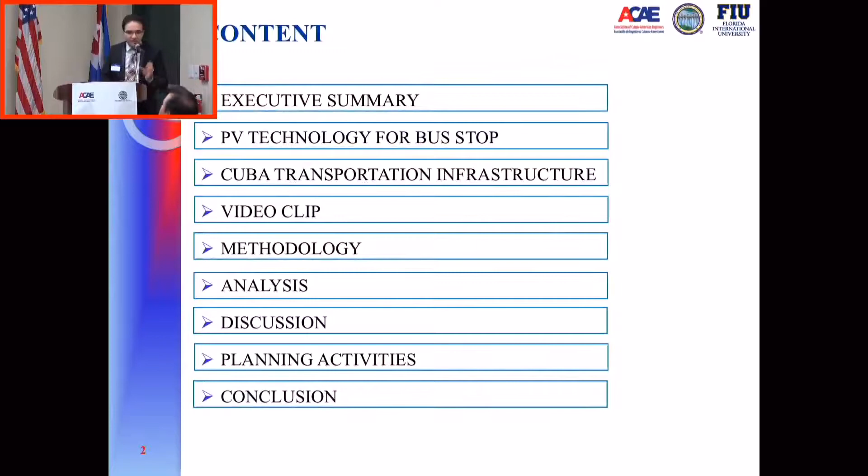At the beginning of the presentation, we would like to talk about the executive summary, and then explain the PV technology bus stops and Cuba transportation infrastructure. In the middle, we're going to show video clips and the methodology, analysis, discussion, planning activity, and finally the conclusion will be presented.

The main goal of the project is implementing the solar power bus stop in Havana, providing the public an opportunity to learn about the feasibility of utilizing solar energy, proposing planning activities to engage the stakeholders, and demonstrating a synergistic integration of an interdisciplinary research team, including transportation engineers, electrical engineers, and economists. Enhancing visibility at night and providing greater safety, and increasing the level of education regarding green energy integration are the main benefits of the project.

The approach: this project has three approaches. First, collecting the transportation and electrical information, then estimating the overall cost of the proposed solar power bus stops, and finally selecting the key bus stops for installing the PV technology.

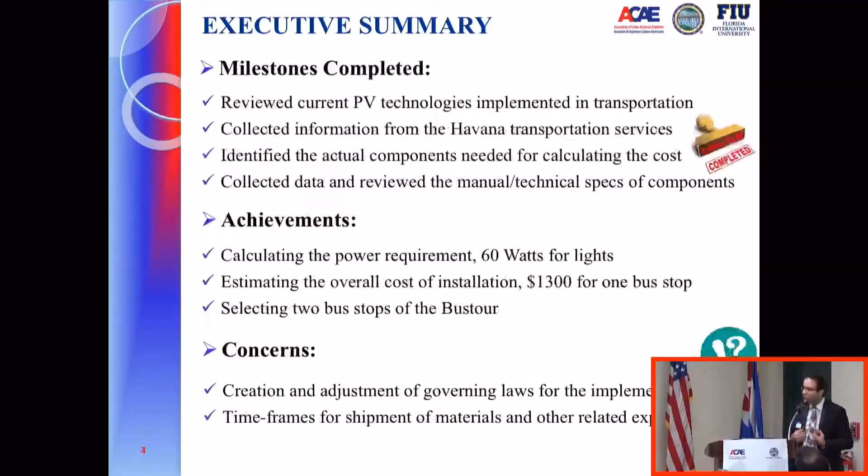To complete the project, we reviewed the current PV technology implemented in transportation services, collected information from Havana Transportation Services, identified the actual components needed for calculating the cost, and finally collected and reviewed the manual and technical specs of the components.

Our achievements include calculation of the power requirement for the electrical equipment for the solar power bus stops, for example 60 watts for the lights, and estimation of the overall cost for installation, for example $1300 for one bus stop for providing the lights. Finally, we selected two bus stops from the bus tour in Havana Transportation Services.

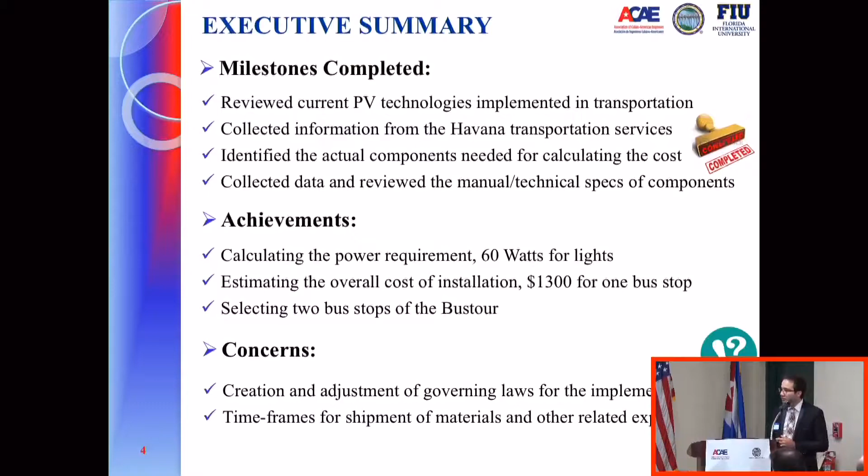There are two concerns we would like to address in our project: the creation and adjustment of the governing laws for the implementation, and the time frame for shipment of the materials and other related expenses.

In the next couple of slides, I would like to talk about the PV technology for solar power bus stops. PV systems usually consist of four major components, the first being the solar panel. The solar panel is made of modules of solar cells, which can be manufactured with different types of materials, such as polycrystalline silicon or monocrystalline silicon.

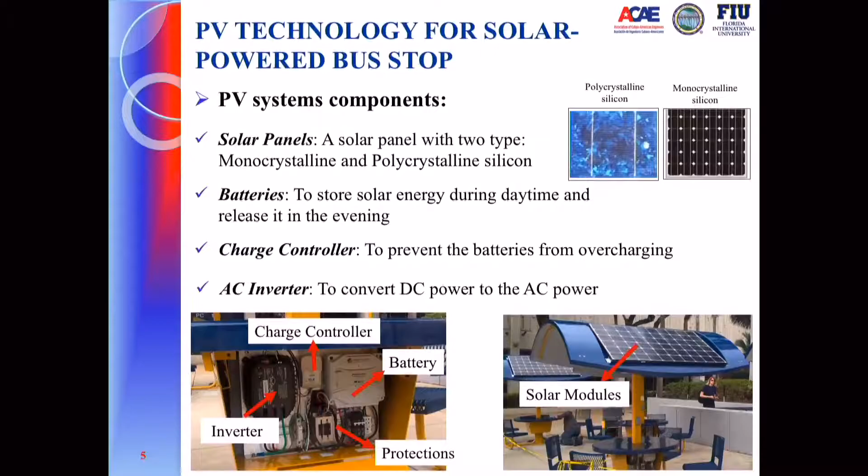The second item is the battery. The battery can be used to store energy during the daytime, the sunny time, and release it during the evening and night. To prevent the battery from overcharging, charge controllers are used in PV system technology. The charge controllers adjust the current and voltage from the solar panels to meet the battery characteristics.

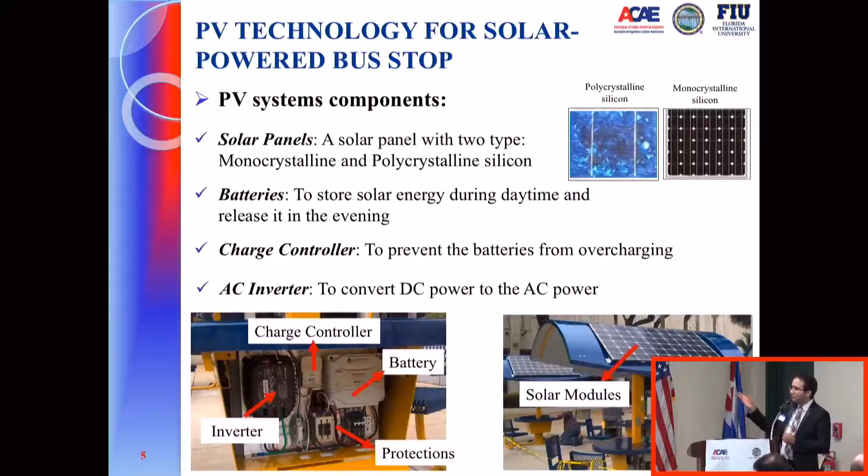For some applications, an AC inverter needs to be used to convert the DC power to AC power. These two pictures show the implemented solar power technology on the FIU campus, including the four major components of the PV systems.

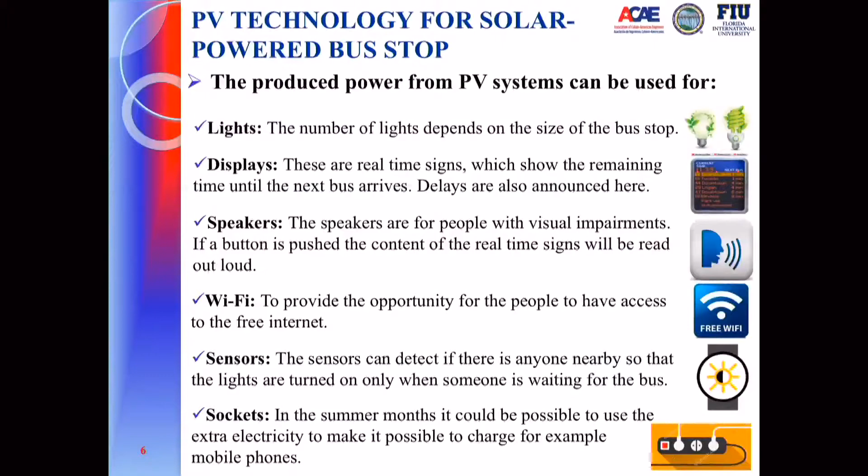The produced power from the PV system can be used for lights, and the number of lights depends on the size of the solar bus stop. A display can show a real-time sign indicating the remaining time till the next bus arrives, and delays can also be announced on the display. Speakers can also be powered by the PV systems, usually for people with visual impairments.

Wi-Fi can provide people the opportunity to have free access powered by the sun. A sensor can detect if anyone is nearby so the lights turn on only when someone is waiting for the bus, saving a lot of energy. Sockets could also be used in the summer months with extra electricity, making it possible to charge mobile phones, laptops, and other electrical instruments.

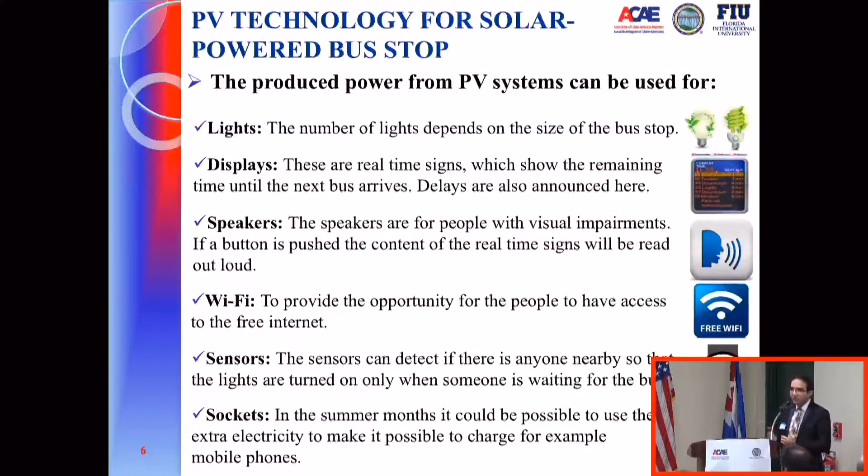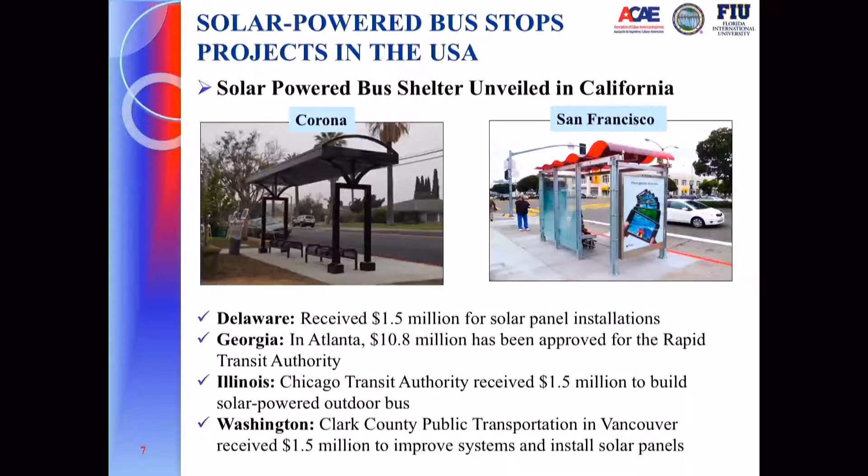These two pictures show two new solar power bus shelters, one in Corona and one in San Francisco, California. However, based on our review, cities all over the U.S. are installing PV technology for bus stops in transportation services.

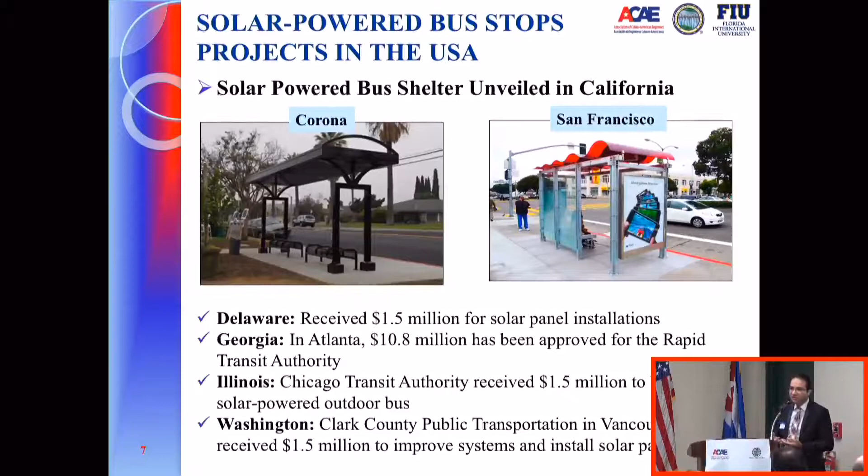For example, Delaware received $1.5 million for solar panel installations, as did Georgia, Illinois, and Washington. That was actually the main motivation for us to think about implementing solar technology in Cuba. Now my teammate Elaine will continue the presentation.

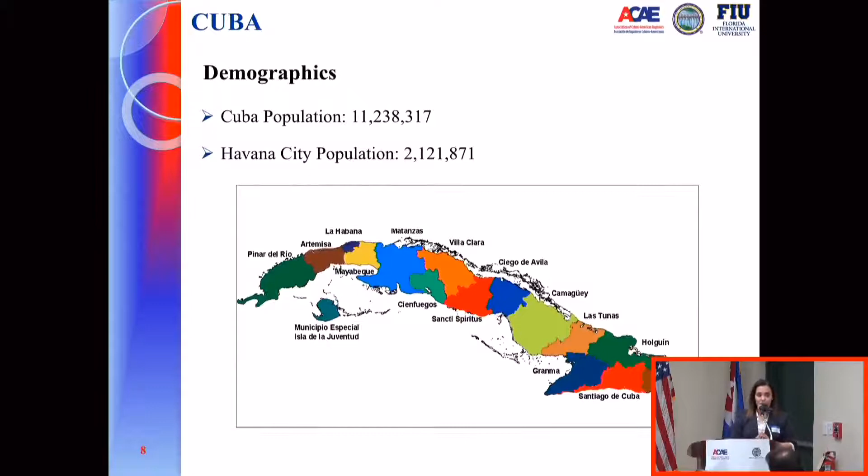For this project, we decided to focus on Havana, given its demographics and the annual revenue it generates through tourism. Havana is the most populated province, with roughly 2.1 million residents, followed by Santiago de Cuba. Annually, Havana receives over 2 million tourists, generating roughly $20 million in revenue.

Given its importance as a center for economic development, we also think it is important that Havana sets the standard for public transportation around the country.

However, the Ministry of Transportation has been facing many issues throughout decades: instability, insufficiency. The prominent lack of safety and the low quality of services are of major concern.

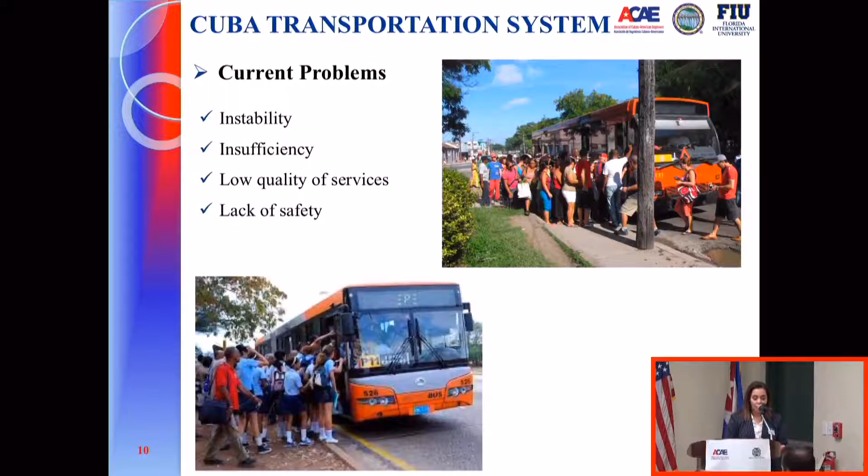Public buses in Havana operate Sunday to Sunday, 24 hours a day. Over 1 million travelers use the public buses daily, with waiting times ranging from 30 minutes to an hour and a half. The night service, popularly known as La Confronta, has waiting times of up to 2 hours and even more, as many buses are retired from the streets past midnight.

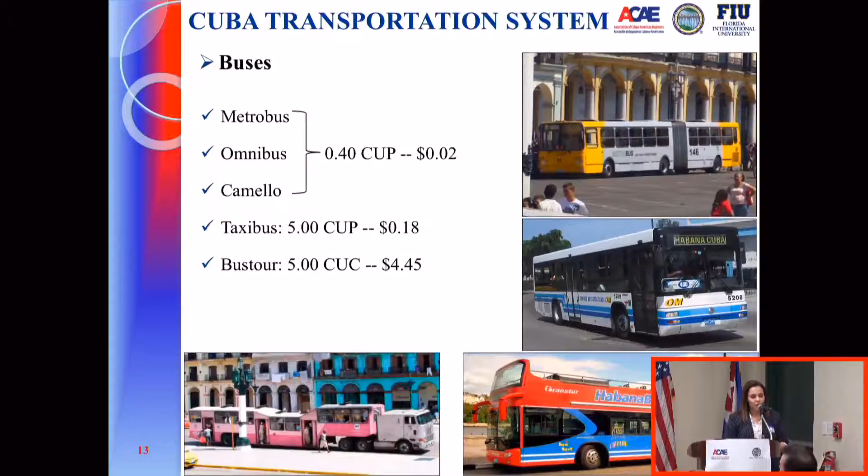The price per ride is 2 cents for the most commonly used service, while the bus tour cost is approximately $4.45. This is equivalent to 125 Cuban pesos, or a week of work for the average Cuban citizen. So it's mostly affordable for tourists.

The main routes are now serviced by the Metrobus, as the Camello has been retired and sent out to the eastern provinces, such as Santiago de Cuba and Guantánamo.

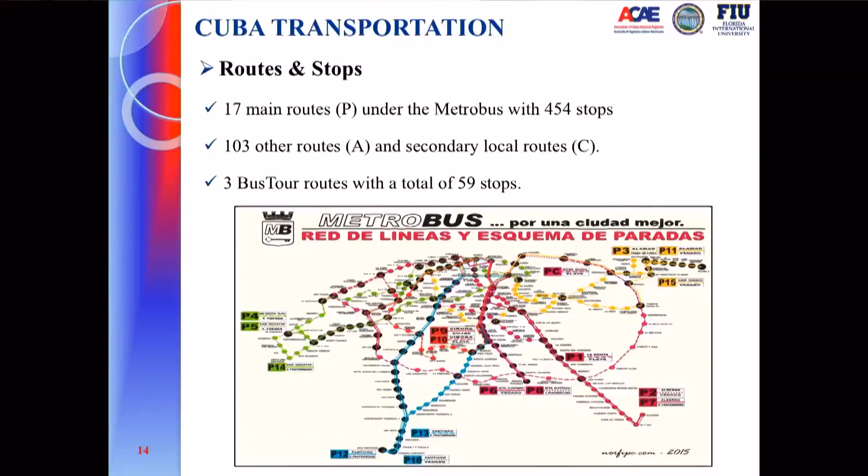There are 17 main routes labeled P. They range from 1 to 16, with an extra route named PC. There's 103 other routes and secondary local routes C, in addition to the 3 routes serviced by the bus tour. This amounts to 3,030 bus stops around the city, and only 35% actually have a shelter.

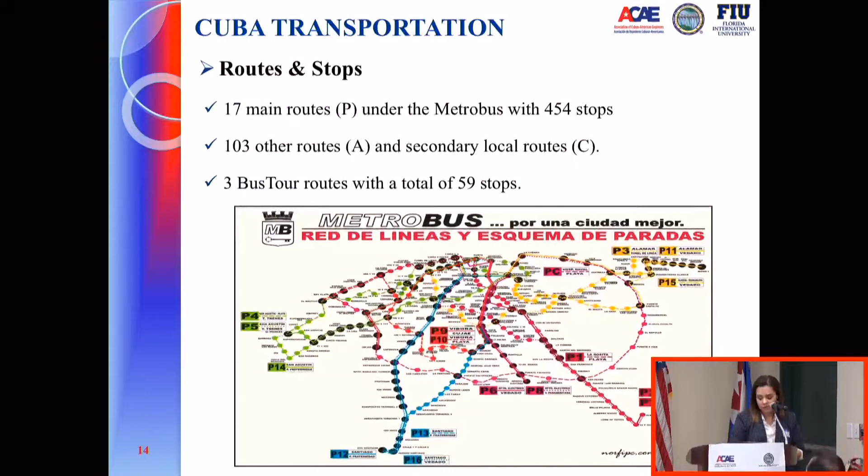The proposed shelters by Sol Urbano seek to enhance visibility, not just for the drivers, but also for the passengers, and increase safety, not simply at night, but also in case of a blackout. We also seek to promote renewable energy use throughout the city on a daily basis, and we wish to educate people on the positive impact that this has for society and the environment.

We will now show you a very brief clip to help you visualize how Sol Urbano, by combining transportation, telecommunications, and renewable energy, will set Cuba worlds ahead.

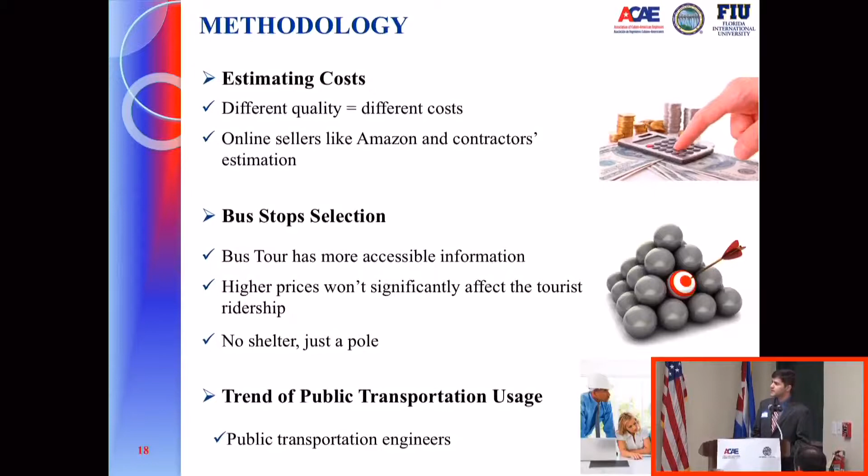And also we wanted to know what's the effect of having a good, new, technologically advanced bus stop on the ridership of public transportation.

So this is the proposed bus stop that we are going to speak about.

It has 45 watt solar panels, which provide 200 lumens per lamp, able to provide 3 lamps. And we need to have solar panel support frames and 3 20-watt lamps and a 12-volt battery system, a wiring battery enclosure, and a solar 12-volt charger and controller. All in all, it costs $1,300 US dollars.

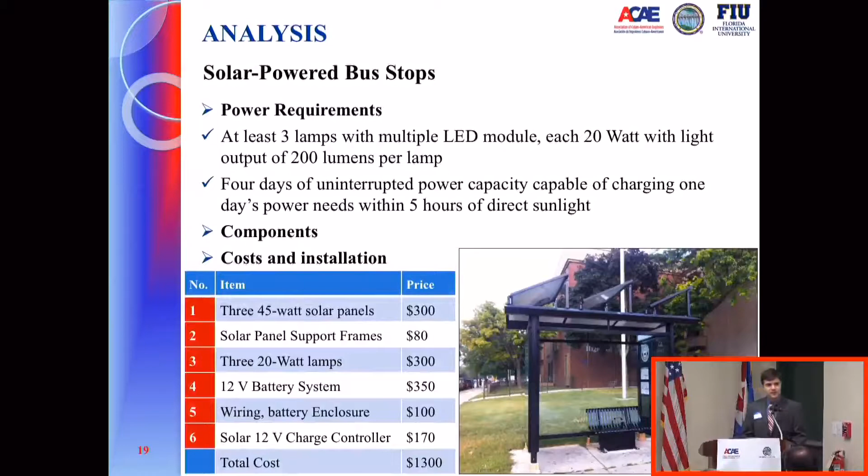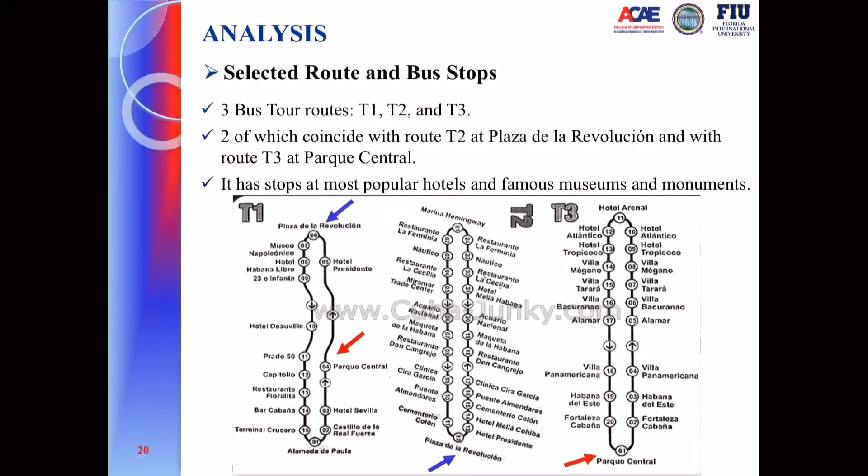And then for the route selection, we decided to choose the T1 route, Tour 1, because it has 2 main bus stops which intersect with 2 other ones: first, Plaza de la Revolución, and another one is Parque Central.

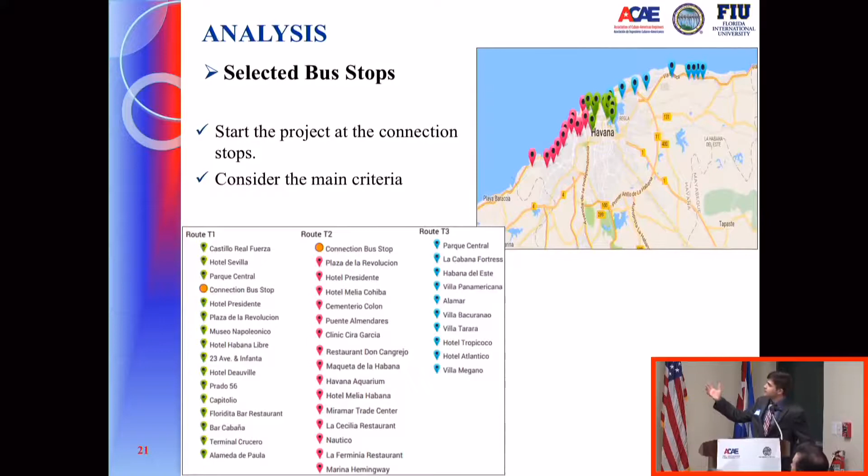And this is giving another interface of the city, and that green one is T1, Tour 1. So the main concern for all the decision makers and authorities is to motivate people to use more public transportation and prevent them from using their private cars.

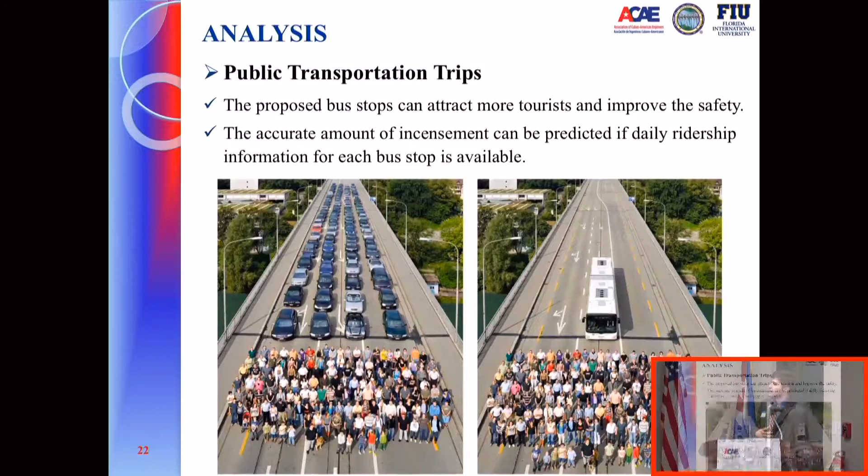So definitely with having a better facility and better quality of public transportation, people are more motivated to use public transportation. One of the main benefits we can discuss is having a light. That's it. So it increases the security of people, especially women and children, during the whole day.

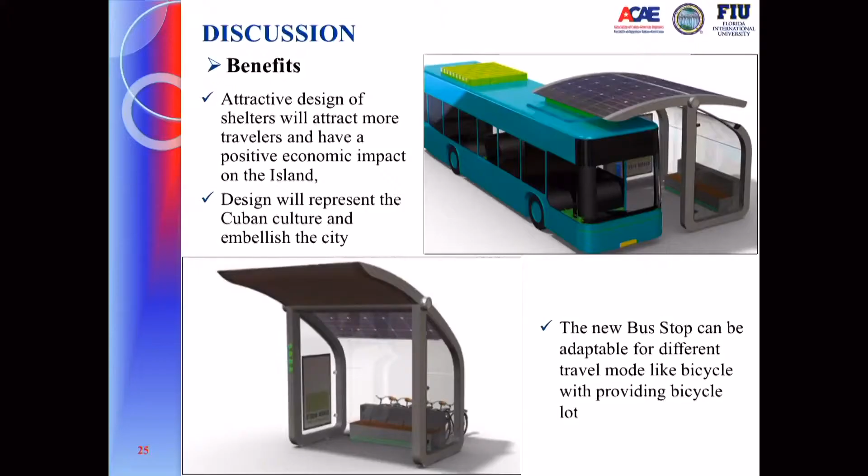And another benefit is giving the people more information about when the bus is coming and when the next stop is. Also, a good attractive design of shelters will attract more travelers and have a positive impact on the island. It also presents the culture of Cuba.

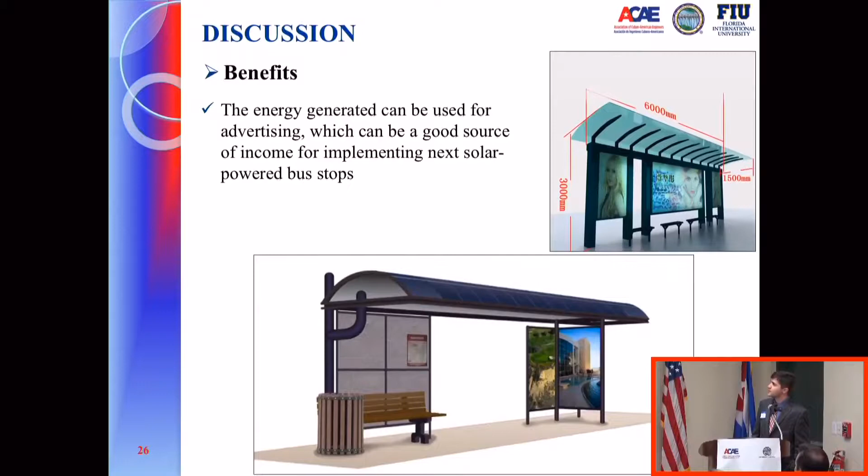Another benefit is having an advertisement, so it can be a very good source of money for the next bus stops. And it can definitely improve the culture of Cubans—they know that it can be used near their house, and it increases culture.

So we also have some concerns. Definitely the first concern is vandalism. Vandalism is all over the world; however, we need to know that the solar panels may be damaged or stolen.

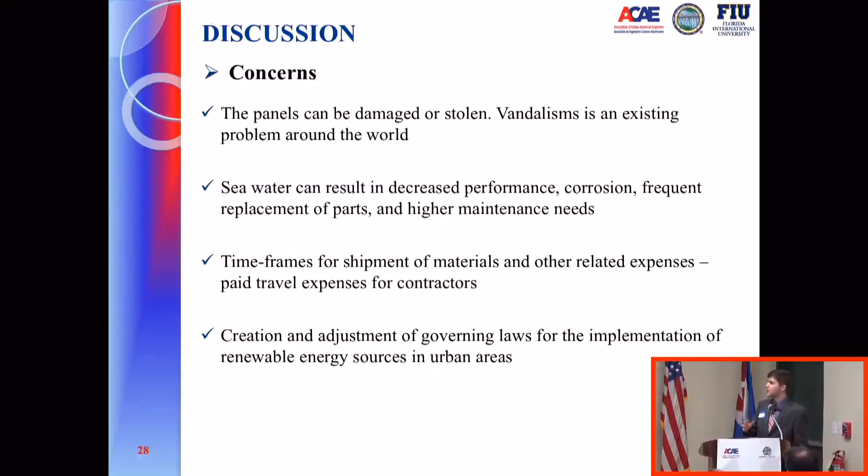Also, the seawater has salt, which may bring some problems for the efficiency of the solar panels. And also, the shipment to Cuba may be challenging, and convincing the government may be another issue.

And then definitely we want to make whatever we said implementable. We need to have planning activities. Those planning activities decide who is going to take care of what, who is the project leader.

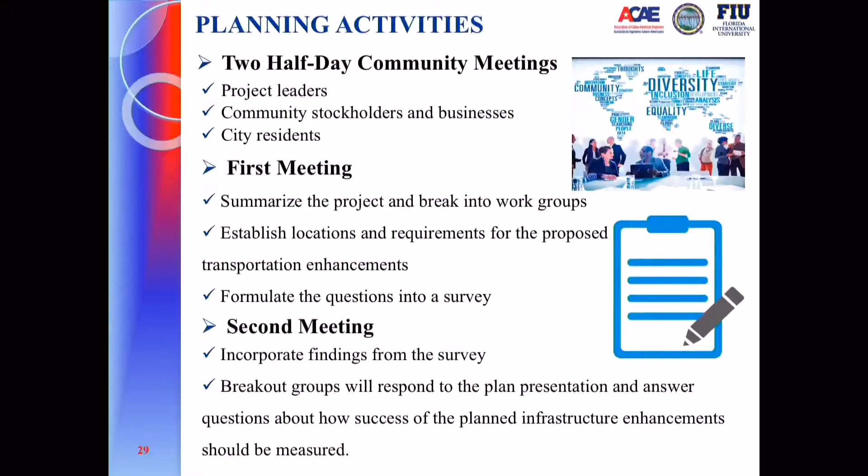In the first meeting, we are going to break down the project into different groups. Different people are assigned to different parts of the project, and we establish a location for which bus stops are going to be worked on, and formulate the survey to know the people's ideas.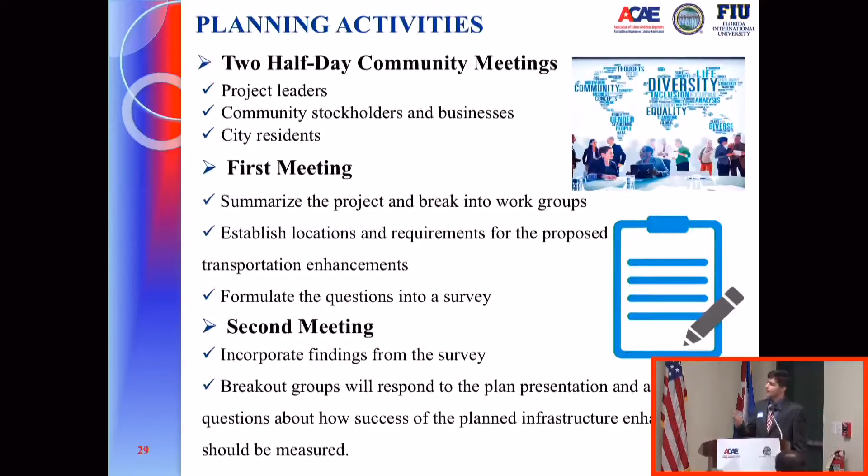And then the second meeting, we follow up, knowing the people's ideas, and finalize everything.

As a conclusion, I would like to say that this project is the first and novel project in bus stops and smart public transportation in Havana, which no one has previously worked on. The solar panels, the current situation of Havana, the costs, and the selected bus stop were explained. Also, we talked about the main benefits and planning activities.

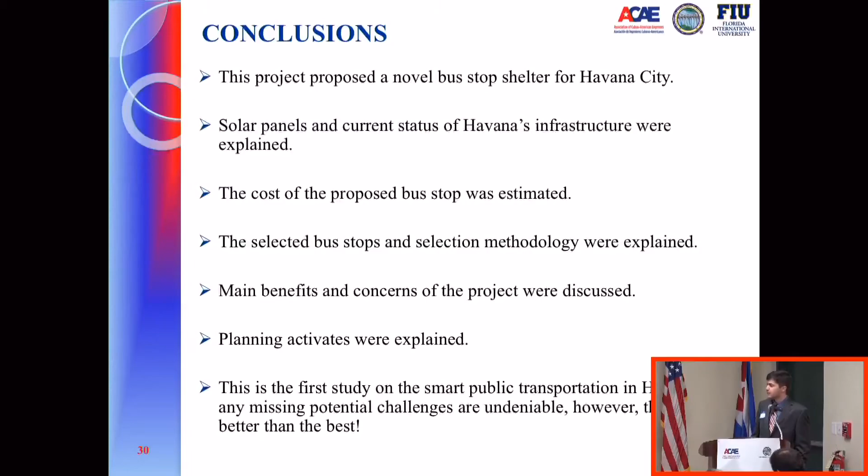This is the first study on smart public transportation in Havana, and any missing potential challenges are definitely undeniable. However, the first is better than the best. Thank you so much for your attention.